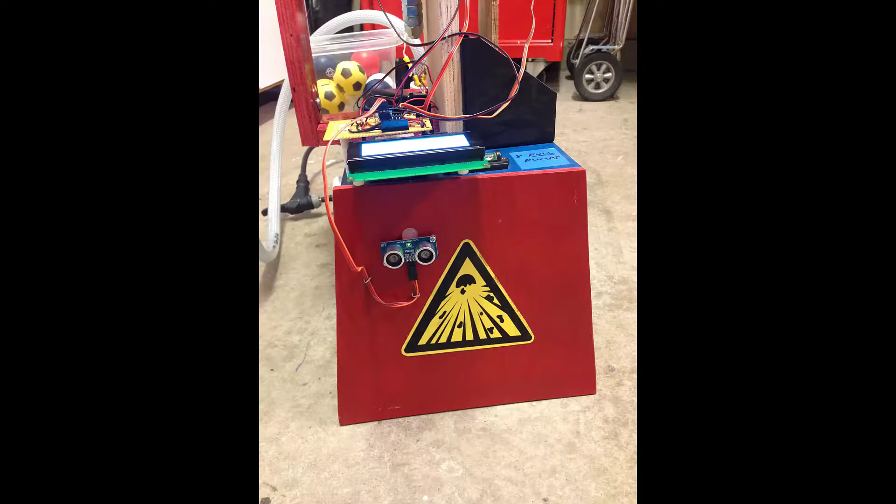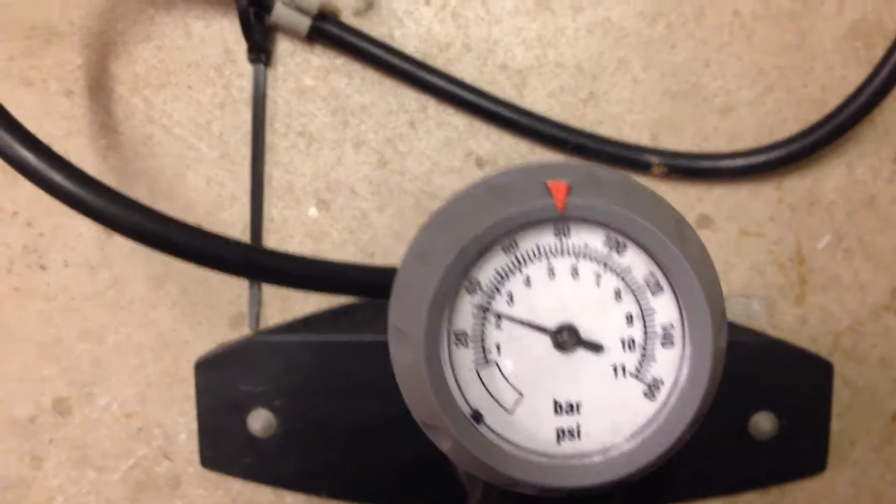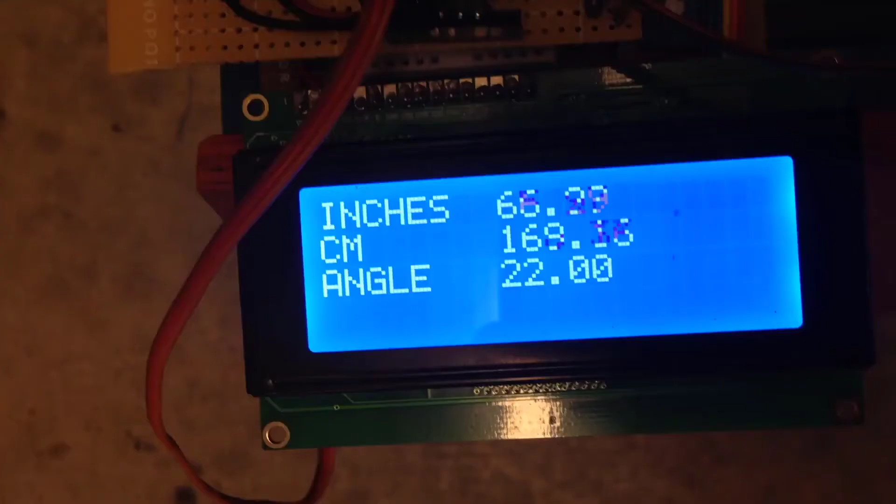A few years ago, my kids and I built a ping pong ball launcher. Same concepts as the M&M launcher, but it used compressed air to force the ping pong ball out of a small tube. You would pump up the small compressed air tank with a tire pump, 7 complete pumps to be exact, and then it would use the ping sensor, same one we'll be using, to measure the distance to a bucket. Once it measured the distance, you'd push the launch button, and in this case it would set the angle, the launch angle in the tube, and then release the air to fire the ping pong ball, hopefully into the bucket.

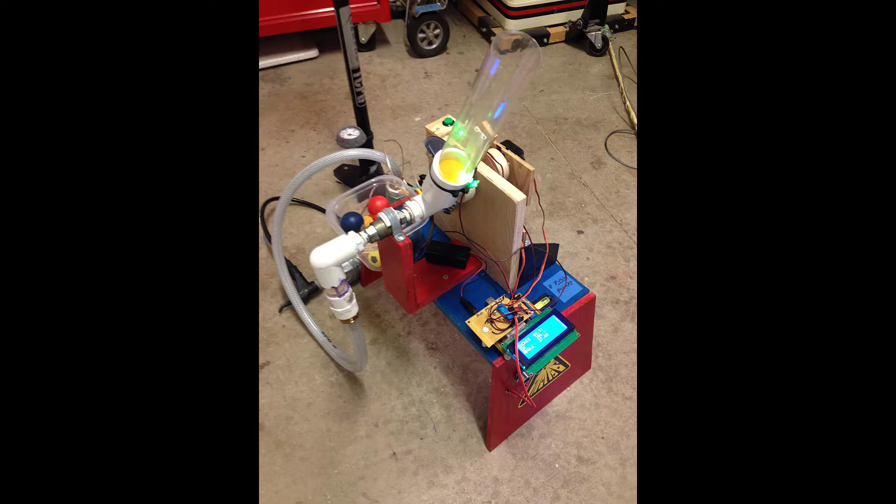The ping pong ball launcher worked well, but it had some variability in the air pressure. If you didn't pump exactly 7 pumps, or if there was a small leak in the air, the distance didn't exactly work out right. I think we can do better with an M&M launcher.

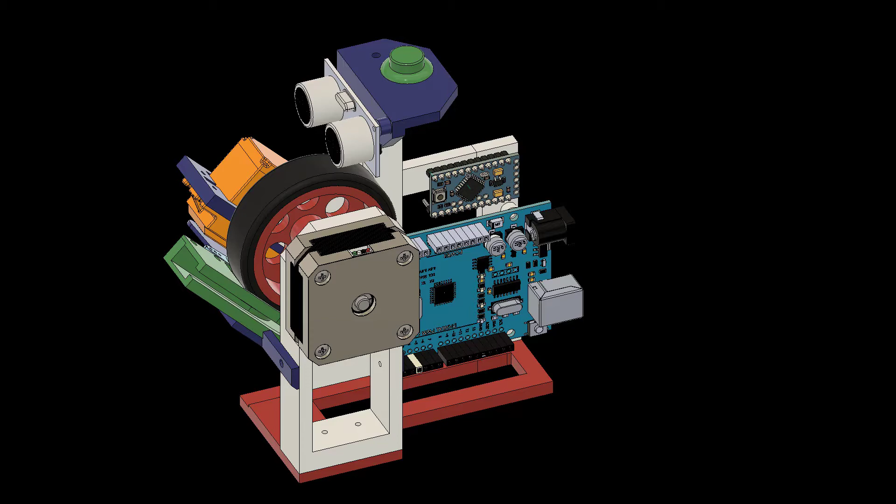Our launcher will spin a wheel that will launch the M&M using its circular or rotational velocity. And we'll always have a 45-degree launch angle. That removes that variable, and now we just have to change the rotational speed of the wheel to change the launch velocity.

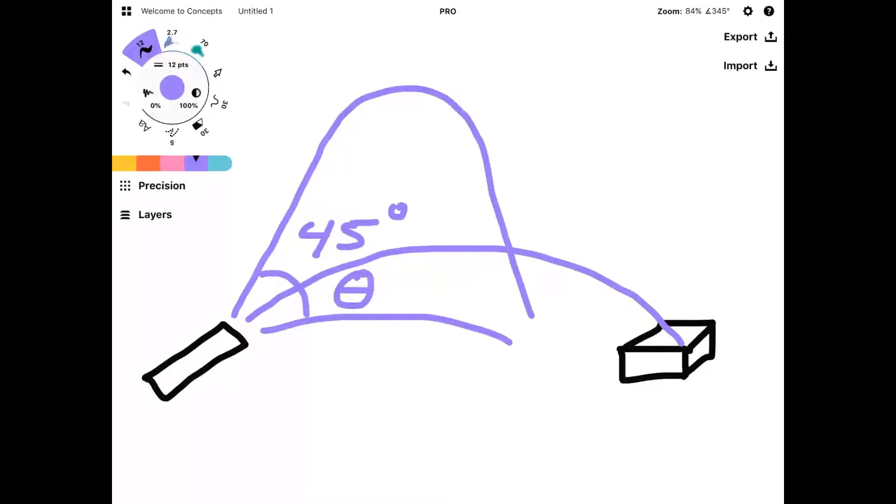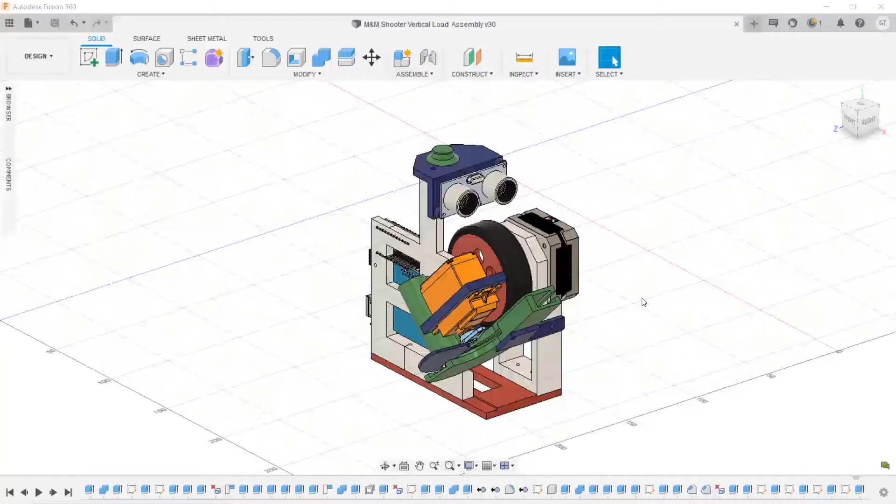I use Fusion 360 for design. If you spend a bit of time designing something in 3D in something like Fusion 360, it saves you a ton of time when you're actually building something, because you're pretty sure things will fit, will be the right shapes, and will work right if you design it in 3D first. Here's how the finished M&M launcher will look. Now let's start putting it together.

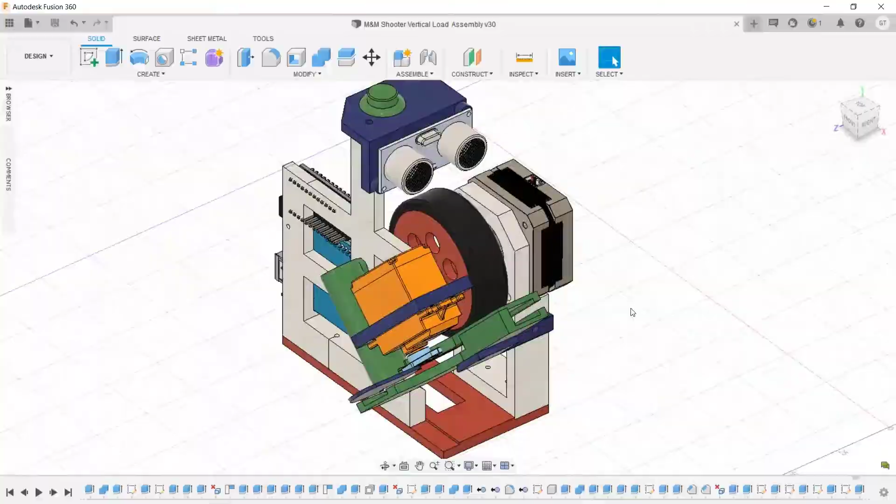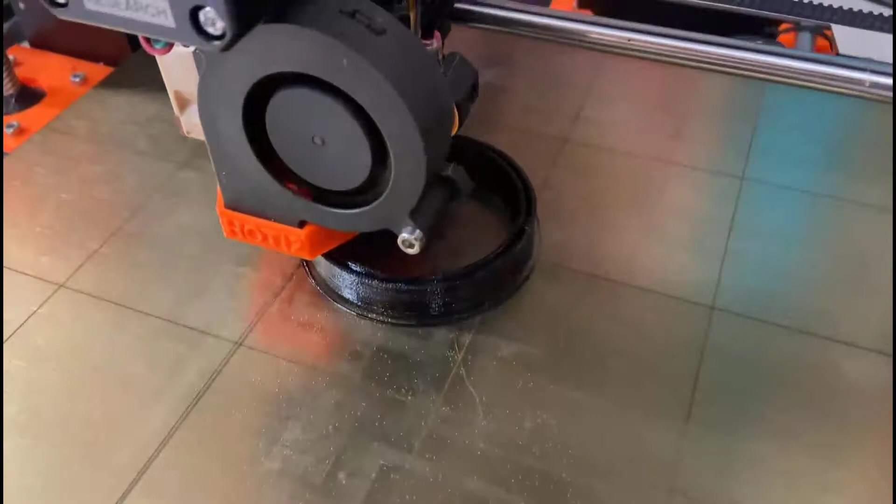We'll print the tire for our feed wheel out of TPU filament, which is flexible filament, also called Ninja Flex. It's fantastic stuff. It's very flexible. You can do tons of things with it. You can print flexible hinges, O-rings, gaskets, tires, all kinds of things. I love working with it. You can see we have a hollow tire actually, so it should have some good flex to it. It should grab our M&Ms well as they're in the feed chute to push them out.

A couple things to remember about flex or TPU if you use it. One is you have to drastically slow down your extrude speeds. Because it's so flexible, the extruder has a hard time pushing it through the nozzle if you ask it to push it too fast. It just bunches up and shoots out of the nozzle in a big scramble of spaghetti all over your build plate. So you have to slow down the extruder. Also, it's really hard to pull off of a cold build plate. You want to pull it off when your plate is still warm. Otherwise, it's really sticky. But Flex works great. We'll get this printed up, we'll finish it up, and then we'll start putting things together.

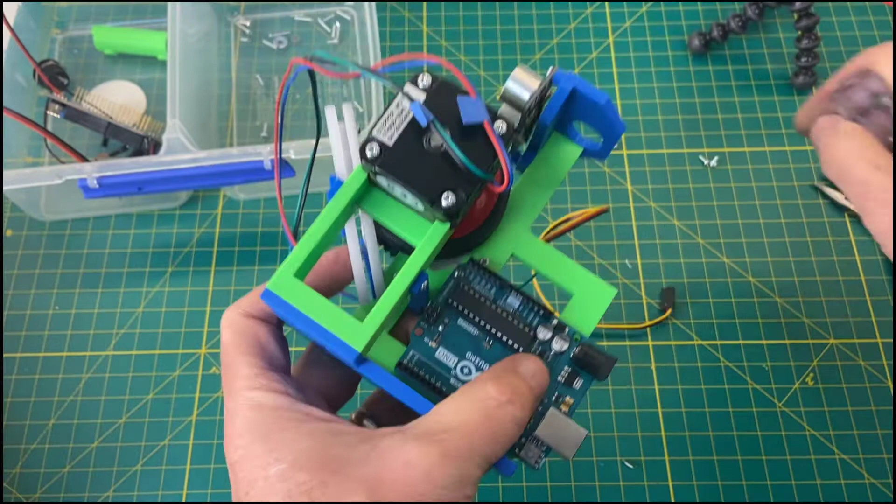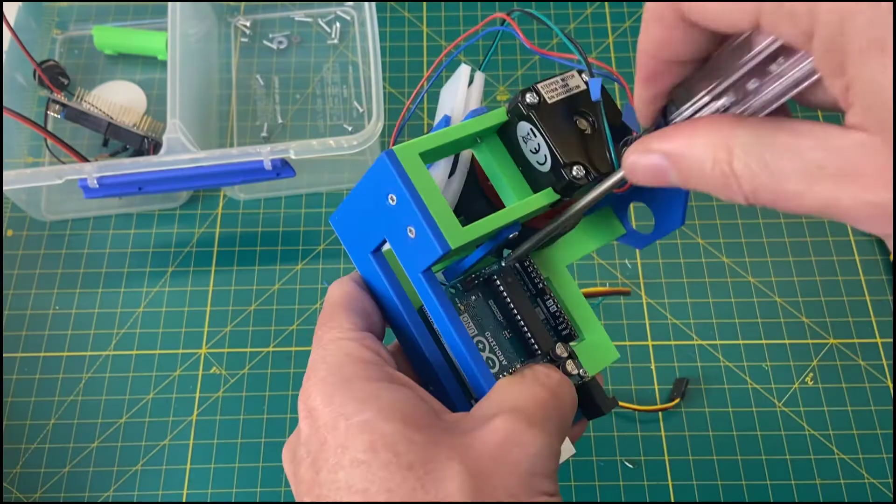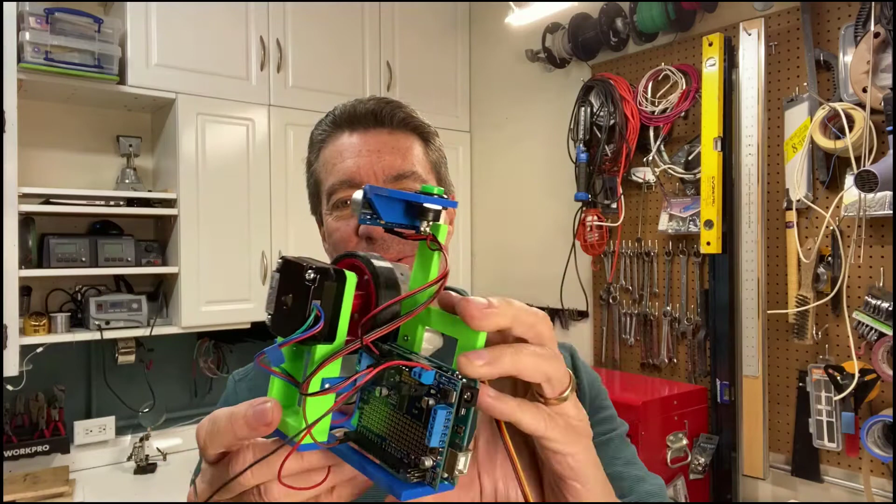All right, it's the next day. I've done some more work on putting together all the motors and electronics here. We're using an Arduino microcontroller, and we're also using an Adafruit Motorshield to power our stepper motor, which spins our launch wheel here.

A couple things I figured out. Last night I spent a few hours working on different problems. First issue, the USB cable that runs from my laptop to the Arduino is bad. That took me a while to figure out, but we replaced it with a working cable. Who knew those tiny cables would go bad like that?

Second thing, our ping sensor on the very top of our unit here. I had mounted it a little bit lower - you can see a little spacer I had to add here. When it was lower, it was still a good bit above the launch wheel, but for some reason the ultrasonic pulses would probably reflect a little bit from the motor anyway, so it would give me a constant reading of 14 centimeters no matter how far away a target was. That was frustrating. I finally figured out it was because it was just somehow too close to something below it, which you wouldn't think would be a problem, but it was. I added a spacer to make it a little bit higher, and that solved the problem.

Remember, I said we would learn things along the way - that's one thing we've learned. We'll now call this version a prototype because now it has a modification in it. If I do this again, I'll simply make this tower higher in Fusion 360, and then 3D print it again to make this sit a little bit higher. So we solved the ping problem - that was good.